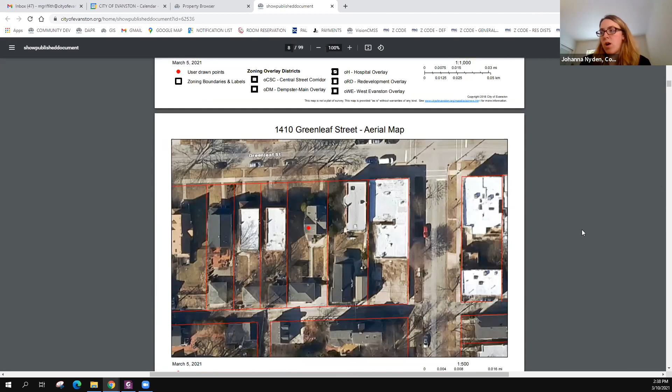Motion passes. Next up is 1410 New Business, Greenleaf Street, preliminary and final review. Laszlo Simovic, applicant, submits for a building permit to construct a new 2-story building with an office and residential live-workspace, and a second dwelling on the second floor with an attached 3-car garage in the B1 district.

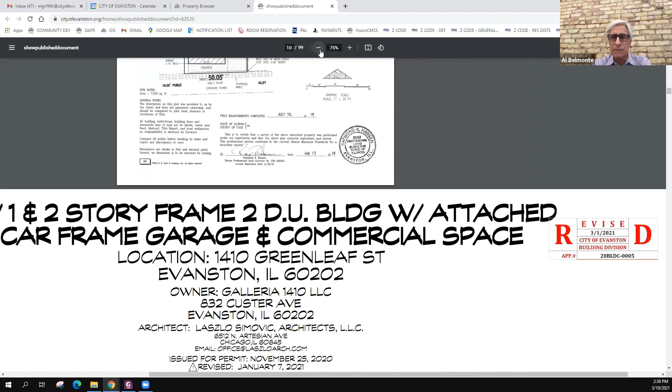Mr. Simovic, are you on the call? Actually, it's Al Belmonte, I'll be handling the presentation instead of Laszlo. All right, why don't you walk us through what the proposal here is?

The existing 2-flat on the site now was deemed too expensive to rehab, so we began to look at alternatives for redeveloping the site. The proposal we came up with maintains compliance with the B1 guidelines. The front part of the lot would be developed as a 2-story office building, connected by a 1-story connection to what we call the middle or center building, which is a combination office and residential, more live-work space.

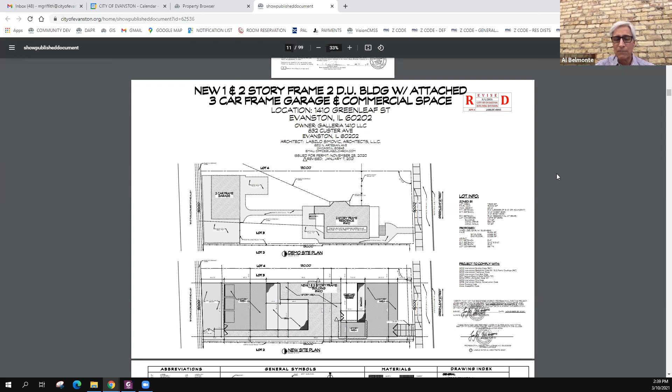I should footnote this would be my personal residence. My intention was to move there. We've lived in the neighborhood for 40 years, recently sold a house 20 feet south of this on Wesley, and our plan was to transition from that house to a new house on Greenleaf. The final component of the site was the 3-car garage with the apartment above, which again would be for personal use, not for rental or temporary B&B type occupancy. It's primarily for our family to use.

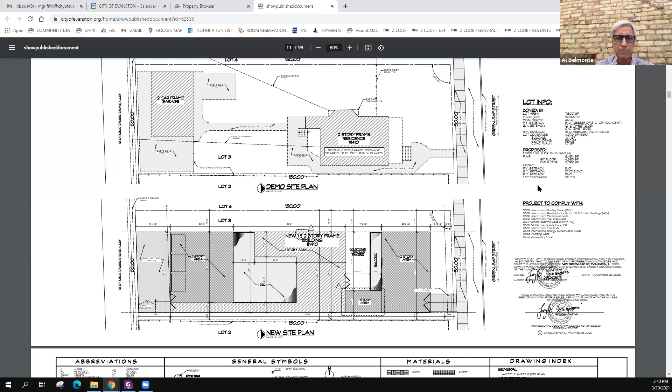Are there any questions from staff? My only comment would be, I know you're in for permit here, so a separate permit is going to be needed for the demolition of the existing 2-flat. I don't see record of that.

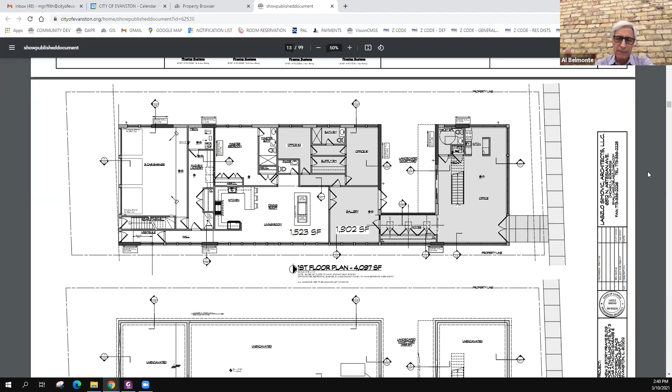Right, and I've signed a contract with Evanston Rebuilding Warehouse, and we're actually going to pull the permit. There's a lot of steps we have to do in order to pull the permit for demo, but the plan would be to retain them as the demolition company. Okay, they're very familiar with the process, so that's good. Yeah, I've met with them several times. We've scoped it out, and we intend to reuse or reclaim as much of the existing home as possible. Okay, thank you.

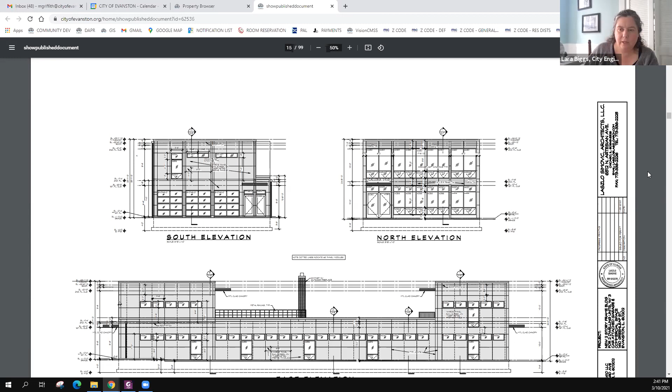Any other comments or questions? How would waste management be handled at this building? There's an area off the back near the garage which would be for our containers. Are you anticipating just the regular rolling garbage cans or an actual dumpster? No dumpster, just the standard city carts.

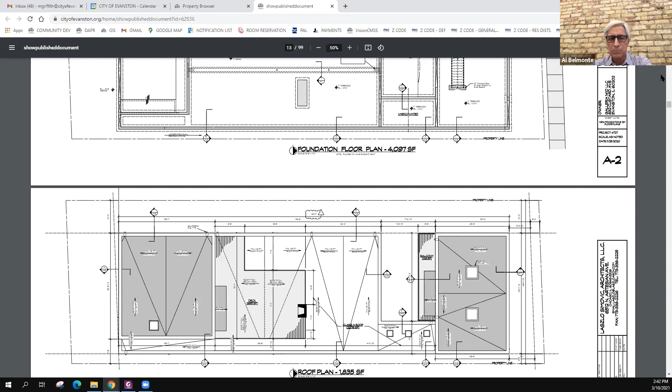We designed a 10-foot swath on the west side of the property, which would allow for storage of the containers and the carts. Lara, do you have a particular concern, or were you just getting clarification? I was just getting clarification.

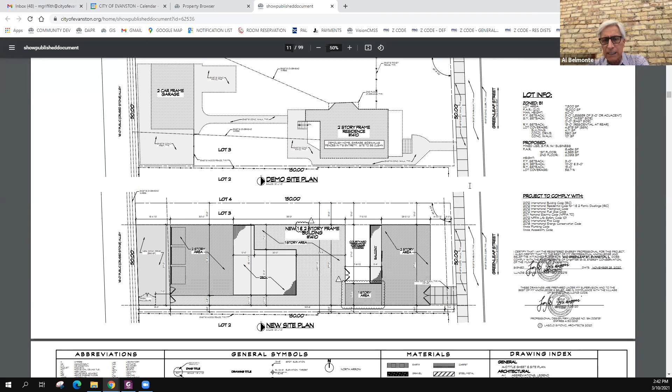I guess the concern is that when you're talking about having a commercial office space, it looks like in order for the people at the office to get rid of their waste, they have to walk through the building and to the garage. Well, there's a 10-foot, actually a little bit more, landscape path on the west side of the lot, and that'll be a landscape path all the way to the back of the property, and they'll be able to access that right off of the courtyard that opens into their space.

And again, it's intended for my personal use, so I don't anticipate any issue with me taking the garbage out, because I do it anyway.

And then because this is a partial commercial building, there is not the same requirement for impervious surface, correct? I guess that's more of a question for staff. We've prepared civil engineering drawings with the intent to comply with the impervious surface requirements, so we will make sure of that.

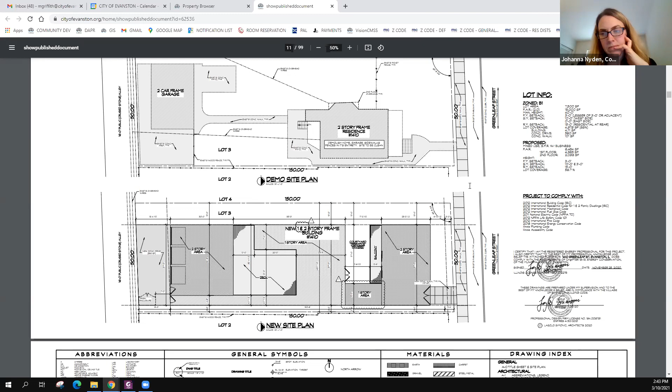All right, any other questions or comments? I have a comment. Did someone else want to speak, or should I go ahead? Go ahead, Kate.

I know you said it was compliant with the zoning code. I do have some concerns with the relationship of the scale of this building, the ratio of the building to the open space on the lot. It seems out of character for this business district, and additionally the residential district to the north. It really consumes about the entire lot, and I wondered if it could be a little bit smaller footprint. It would be more contextual.

I had similar concerns with the material selection. It's really out of context with some nice traditional masonry commercial buildings in this business district. The front-facing facade lacks a lot of relief compared to some of the existing buildings. I wondered if you could comment on that.

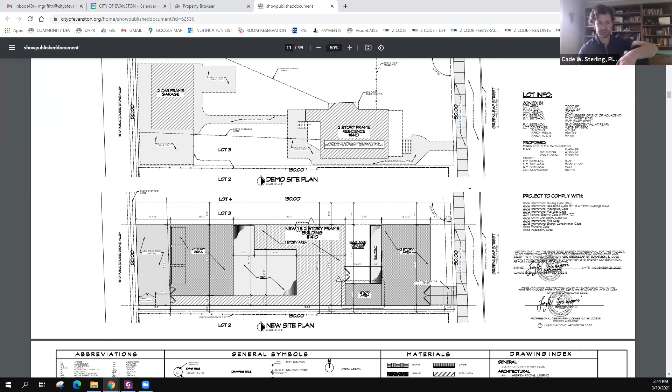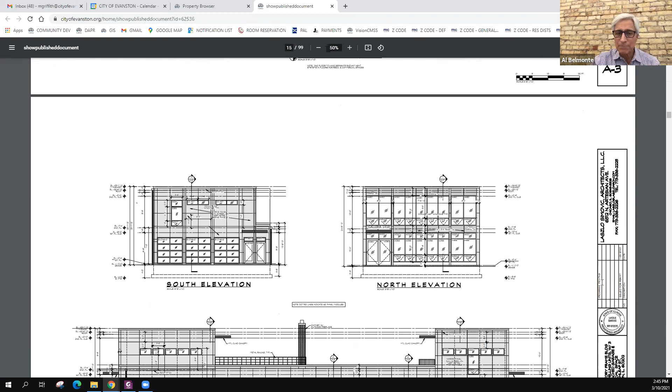Well, again, having lived in the neighborhood for 40 years, I understand what you're saying. Immediately across the street from the site, I think it's 1411 Greenleaf. It's basically 100% lot line to lot line, including the structure on the site and the paving. So in some regards, I think it is consistent with what's in the area.

My neighbor to the east, Russell, has his cello studio on the ground floor of the building. If you look at the footprint of his lot, it's not dissimilar to what I'm proposing. He has a coach house in the back, and his 2-flat extends all the way almost to the coach house. He's got a small yard in the center. Again, to some degree I agree it's not consistent style-wise or material-wise, but it is consistent with the type of use that's in that area.

The building on the corner, 1400 Greenleaf, is lot line to lot line, 1-story commercial. It looks commercial, and the materials have been on that building for not 40 years, because when we moved in there, that was a masonry 1-story storefront type building, and then they covered it with board and batten pine siding.

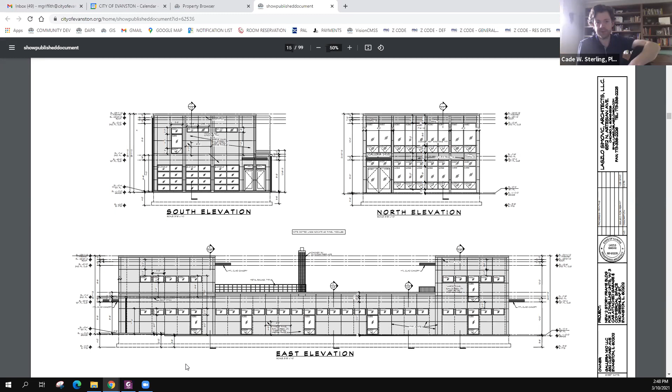And then my last point I'll make is just, after kind of business hours, if there's a way to add some kind of illumination to that storefront, whether it's interior or exterior, that just adds some life and vibrancy to the district. That's my intent. In fact, it doesn't show up very well on this drawing, but there's a metal canopy that extends above the double entry door, and we will have lighting there. I don't want it to be garish, but yeah, the intent is definitely to have lighting there.

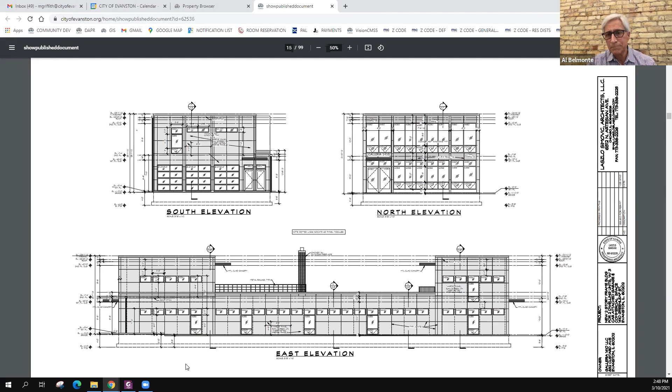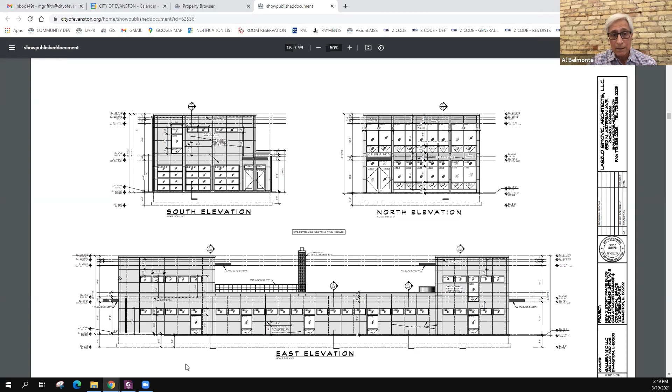Okay, thank you. I just wanted to ask, I'm not clear on whether the current property is occupied or not, because I'm trying to figure out if it's subject to the demolition tax. Yes. Okay, yep, just wanted to check. Thank you. Yep, just keep adding to the bill.

All right, other comments or questions?

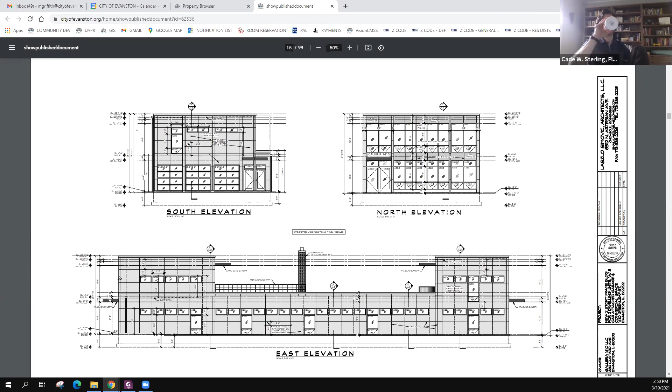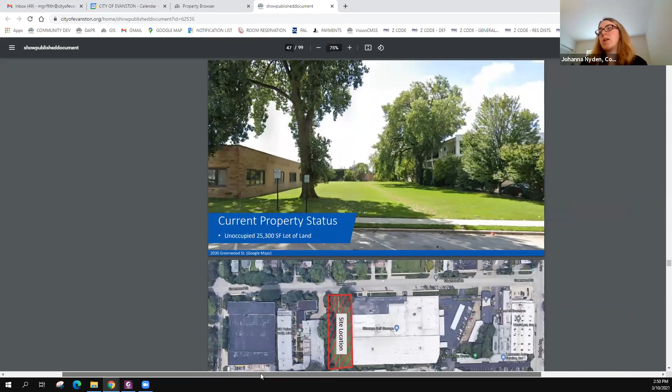Next up, 2030 Greenwood Street, recommendation of Plan Commission and ZBA. This Bohan Artunovic. Applicant submits for a map amendment to rezone property from the I-2 General Industrial District to the MXE Mixed Use Employment District, and major variations for 24 units, 20 regular units plus 4 IHO bonus units, where 22 dwelling units are permitted, and a building height of 4 stories at 38 feet, where 3 stories at 41 feet is permitted.

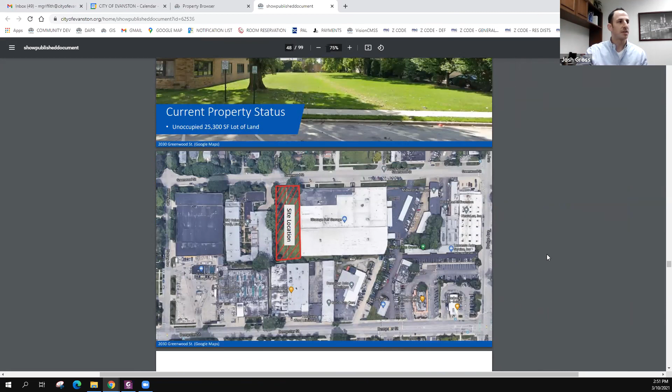Bohan, why don't you walk us through what the proposal is? Hi everyone, I'm Josh Gross. I'm actually going to be walking you through this real quick, if that's okay. Would it be possible for me to share my screen? Sure, you can share your screen. Okay perfect, I'll take you guys through this.

Okay, you guys can see this okay? Yes, we can. Perfect, perfect. So like I said, my name is Josh Gross. I've got Bohan with me as well. Bohan, you there? Yeah, he's got it, he's on mute, he's good. We're good. So just want to thank everyone for your time today, appreciate you guys letting us present.

I'll be taking you through the proposed building we're looking to develop on 2030 Greenwood Street. To get started, we'll give you an overview of what we're planning to do. The overall goal is to build a multi-story 24-unit apartment complex, made up of 3 one-bedroom units and 21 two-bedroom units. Of those 24 units, we plan to have 2 IHO affordable housing units, as well as 2 ADA accessible units.

One thing we're very proud of and want to call out is that there's a difference between adaptable and accessible. These will be accessible, grade-level, wheelchair-accessible units, which we're very excited about.

Going into the overall size of the building, we're looking to do a building that's going to be just over 9,300 square feet. The overall area, including our parking garage and building A and building B, will total just over 36,000 square feet. We're very excited about the 39 on-site, completely covered parking spots we'll be building. To give some conceptualization of the size of the apartments, we're looking at about 600 square feet a unit, ranging on the higher side to 1,250 square feet. For rent, we're looking between $2 and $2.25 per square foot.

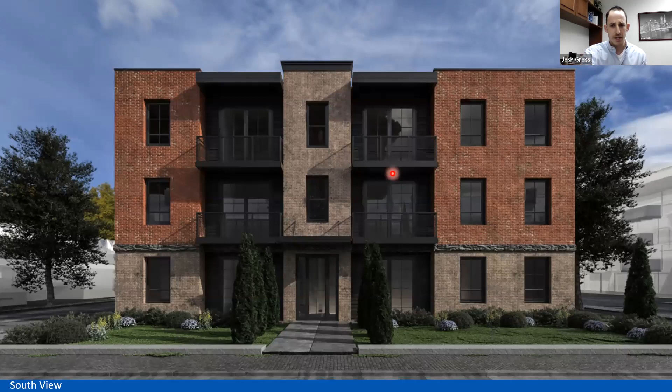Without further ado, here's our front-facing facade. This would be building A, visible from Greenwood. This would be housing our 6 units, with 3 single-bedroom units on the west side and 3 two-bedroom units on the east side. One thing that's very important for us is greenery.

I'm a green thumb myself. One thing you'll see throughout this entire presentation is our focus on greenery, trees, grass, bushes, plants, things of that nature, all to tie in with the overall decor and aesthetics of the whole property. As we move on to the additional renderings, I want to give you a quick little tour.

On the west side of the building, which you can't really see from this angle, we've got a long pathway that gets you to the back of building A and gives access to building B. On the east side is where we'll have our driveway. If we take a stroll down the driveway, here you'll see building A that we were just at, and we're driving down. This would be the entire footprint of building B, which will house 18 units, all 2-bed, 2-bath units.

The property is constructed of 3 buildings. You have these 3 vestibules right here, which will give you access to 6 units, 3 on each side. All of our parking, as mentioned, is completely covered, housed on that first floor. Then we've got our 3 additional floors on top of that, which is where all of our apartments will be.

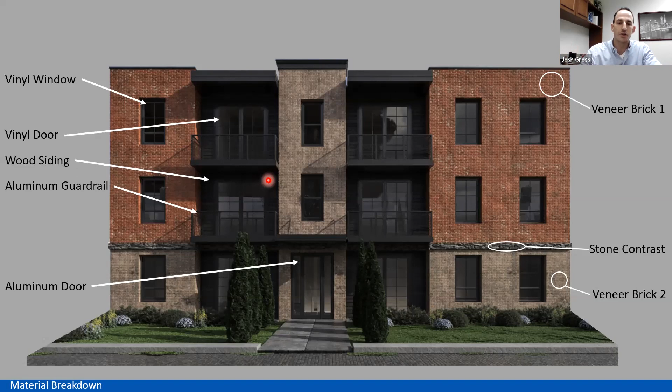We've got darker stained wood throughout the balconies. Then as we go to building B, which you can see much better, we're going to accent the building with wood paneling. You'll see that on the side of the building, as well as on each vestibule on both sides. It's a nice way of changing it up. Brick and stone can sometimes be very heavy on the eye, so this creates some contrast without adding too much weight.

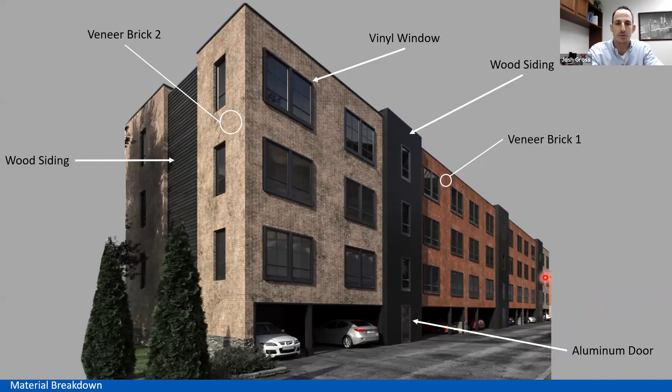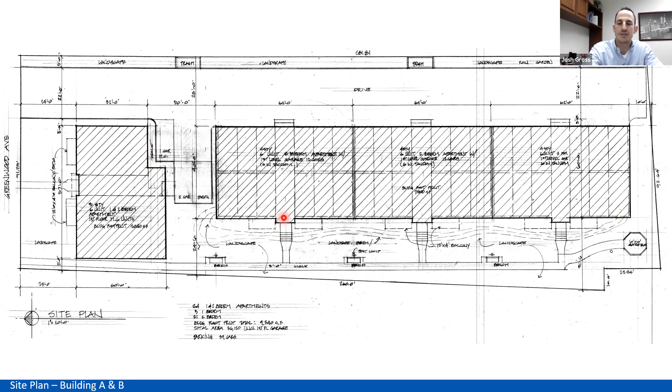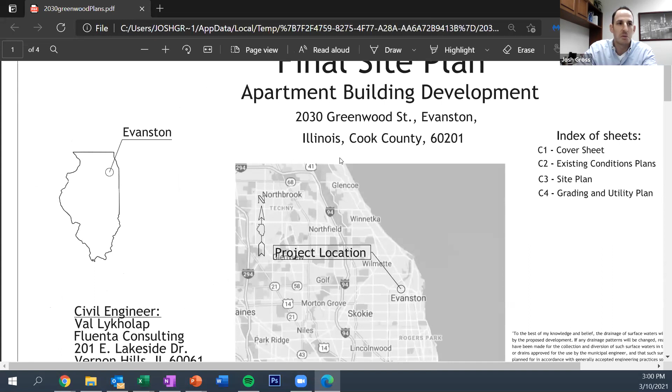Is this new rendering coming through? Yep, okay, yes, it's perfect. Yes, we can see it. Excellent. So this is from our civil engineer, just another take on the property.

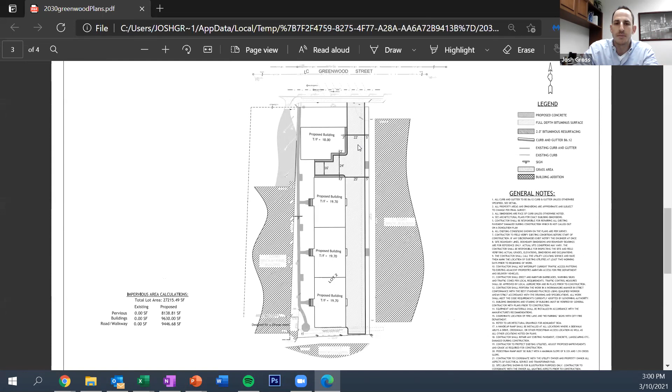So this is kind of just the property as is now, the existing condition. And here is an additional site plan showing curbs, gutters, and additional layouts. But the part I wanted to show you guys, I don't know if Melissa passes this through to everybody, but this is our grading and utility plan. We've got all of this set in place, which shows the flow of water and how everything's going to be drained, basically the overall utility and grading of the building. We can go into this in further detail if you guys need, or we can distribute this for you to review at a later date.

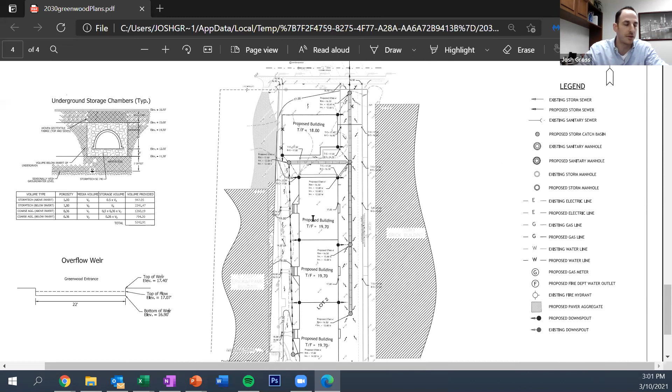If you don't have anything else to present, why don't we pause there and go back to the site plan, and we can start asking questions.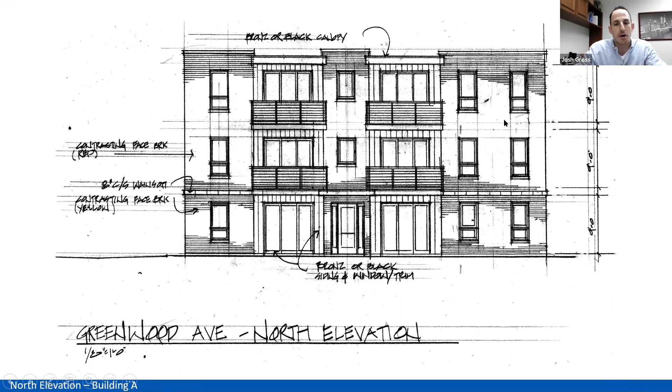Okay, there were a few things I wanted to go over on elevation, if that's okay. The next thing is the elevation, since I know this was coming up at the end. The cool thing about this is, because we have two buildings, building A is actually going to be 30 feet tall. We've got 3 stories because it does not have a parking garage underneath it, so it's on the shorter side. Looking back through to building B, which does have the garage, we're coming in under 41 feet, at 40 feet. So that's something we're very excited about, it won't be anything too overwhelming.

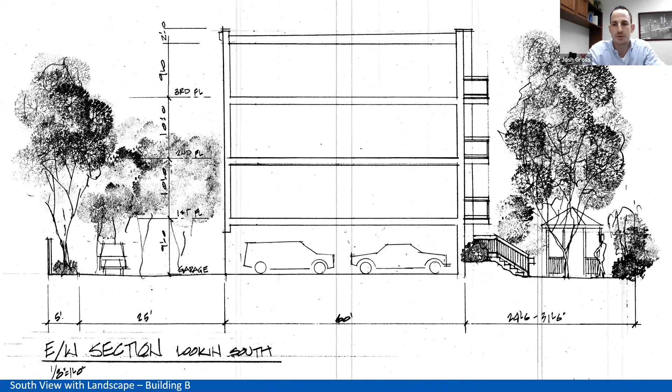Here's that same view with some trees and greenery. Here is the south elevation of building B. Again, the parking garage will come up to this line, and then we've got floor 1, floor 2, floor 3 that will be our apartment units, with some greenery as well. Here's the opposite side, so you can see where the height comes into play—again, parking garage, and then 3 floors of apartments.

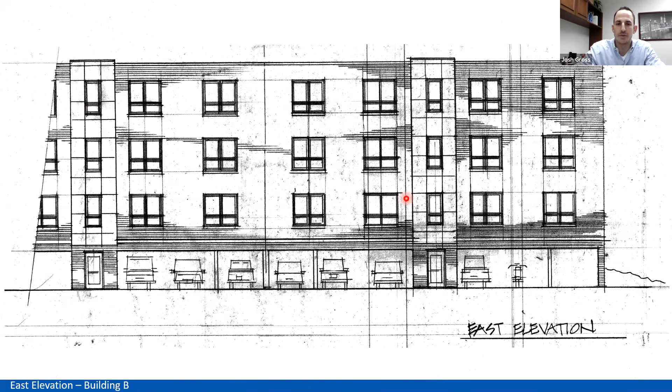Do you want to go over floor plans? I think we're okay to not go over floor plans. Okay, fine, I think this group can talk a little bit more about site issues. Okay, perfect. Then where would you like me to go?

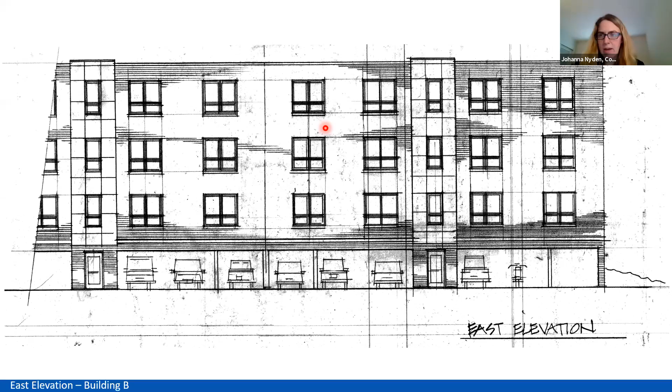Why don't you go back to the site plan, and we'll start maybe with public works, if you have any comments on this.

Comment would be, where would the refuse collection take place from? And will there be enough room for a refuse truck to turn inside, or will they have to back up on the drive? Just being mindful of cars coming out of blind parking spots like that. Yeah, so all of our trash will be located on the east side of the building. We've got a 20-foot wide drive.

Josh, I think you're breaking up a little bit. I'm breaking up, yes. Is it better now? I would suggest maybe just turning your video off, that sometimes helps with the audio. Okay, let me.

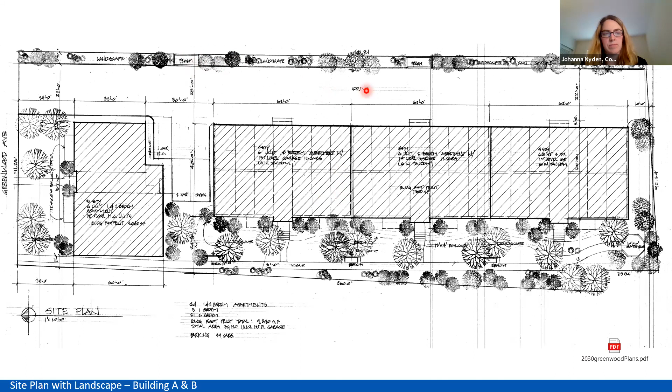So pertaining to the trash, we've got that 20-foot wide driveway, which does meet the code. Our trash will be located in 2 areas, right here and right here. Due to the amount of tenants we're having, we're not looking for a massive dumpster. We don't think we're going to be going through that much trash. So we should be able to fit pretty considerable size dumpsters in these 2 spots and be able to get that picked up and removed without any issues.

Okay, thank you. You're welcome.

Another concern here would just be for snow removal. Private entities aren't able to push any snow from private property onto the city right-of-way or city property. So do you have a plan of what you would do with the snow from within your drive and property?

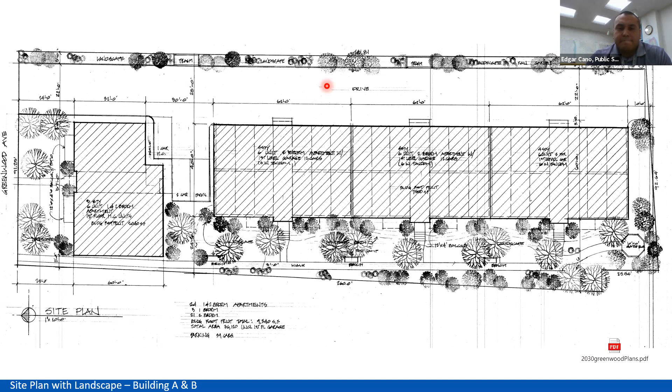You broke up slightly. I think the question was snow removal, correct? Correct, snow removal. Do you have a place that you would be storing it, or will you be hauling it out?

The idea is, obviously these last couple of weeks we had more snow than anyone knew what to do with. In typical fashion, the idea would be to push, if we have an inch or two of snow, along this eastern side and then store the balance in the back. If it did get to a point where it was overwhelming and too much for us to hold and allow our residents to enter and exit their parking garages, especially on the south end right here.

Part of our business is actually a loading and hauling company. So if it got to a point where we couldn't do anything, we would send a truck, load it up and haul the snow away at our own expense to bring it to a facility where it can be stored indoors, melted. And then if we needed to go back the next day or remaining, we can take care of all that. Sounds good.

Thank you. You're welcome. Thank you. Josh, just be aware that's going to be reflected in the minutes. So we will hold you to that when we have another big snowfall someday. Wouldn't say it if it wasn't true. Don't worry.

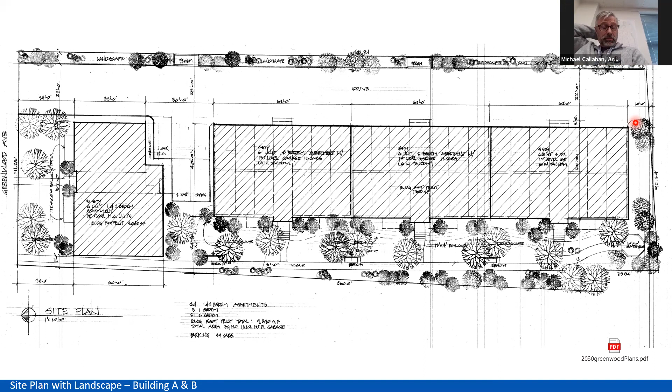Other questions, Public Works staff? I have a question, actually a couple. So that landscaping on the east side, that's going to be right up against the property line and right up against the building to the east side. How's that going to be impacting their structure, and how are they going to maintain that? So the goal is obviously to go right up to our property line.

The types of trees and plants that we're going to be putting in there are going to be put in with the goal of not obstructing access to their building. I know they need access—it's a masonry building, so if they need to do tuck pointing at any point, we have to give them a certain allowance to access their building, just as we would want if it was the other way around. The idea is not to create anything too overwhelming where they would not be able to have that access, whether it's creating a drop or having to put ladders up. So we'll be working with a landscape architect to make sure we're putting stuff that is conducive for the area and allows us to work freely, as well as our neighbors to the east.

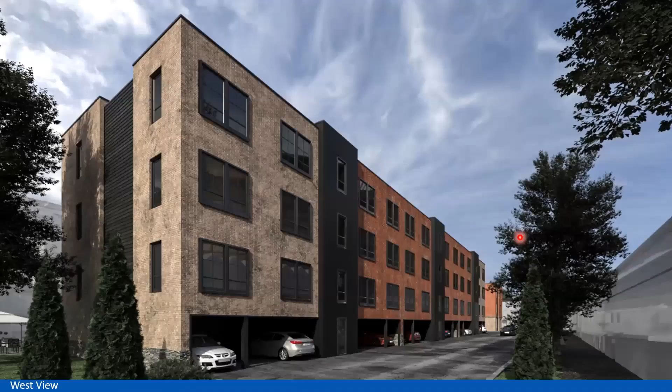And with that said, to the west—on where the driveway is at up on Greenwood and also on the west property line, there's two large cottonwood trees. Looking at this, it looks like both of those trees are going to be coming out. Let me just make sure. So, sorry—as of right now, the plan is this tree will most likely need to come down to make room for our driveway.

But other than that, we have no plan to tear down any other trees. We want to keep them. This tree in the back will most likely need to be trimmed, but the goal as of right now is that it does not affect our building plans in any way and does not need to be removed. So you're keeping the landscaping what's currently there on the west side then? That is the goal, yes sir.

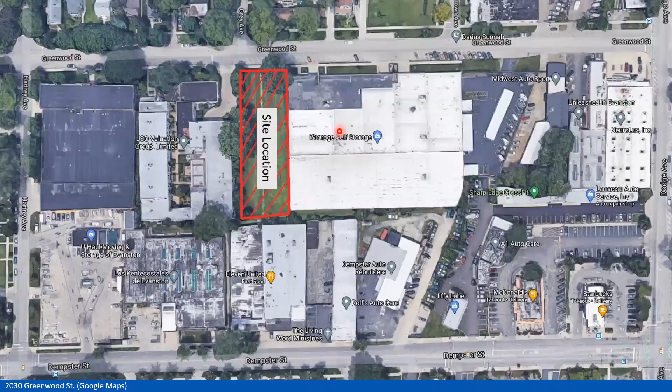Any other questions we can answer?

I have a couple of questions with regards to the parking. Are the spaces going to be inclusive, offered with each rental unit, or is there going to be a separate fee charged for parking spaces?

It's a great question. We actually just spoke about that yesterday. Right now, the plan is to have a very minimal fee for parking to almost incentivize people not to park.

Because we do know, based on past meetings we've had in the ward back in February, parking is an issue in this area. And with the way things are going right now, people are working from home, working remotely.

Obviously a lot of companies are imposing 3-day work weeks, or people don't even come to the office anymore. So if we can incentivize people to not have cars and utilize public transportation, bikes, or whatever the case may be, we're hoping that small fee will come into play.

So that way we can have as little parking as possible. We'd rather have too much parking available than not enough, but that's something we literally just talked about a couple of days ago.

I'm just worried that if the fee is too high, people will still retain vehicles. They just won't opt to lease the space from you, and they'll be looking for spaces on the arterial streets in the neighborhood.

No, if there is a fee, it will be very, very minimal. We didn't come up with an exact dollar amount, but it won't be anything astronomical. Just for comparison, I know city parking could be like $200, $250 a month. This will be nowhere near that.

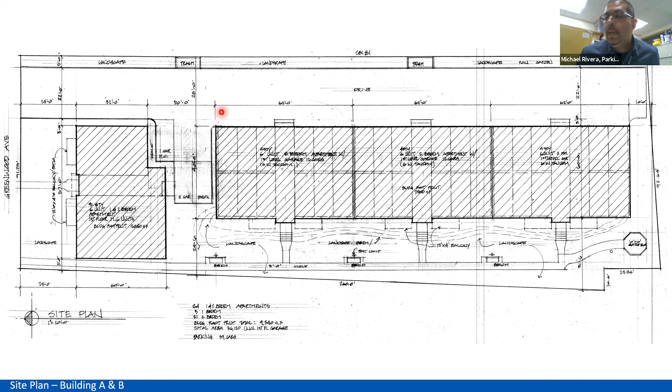So are you concerned about the height or more width? Both. Okay, so one thing about the height, we did talk with our architect.

If it did come into it and we needed to adjust the height of the garage, we could do that and take some off, because basically, if you look at our elevation, we're planning on 10-foot ceilings for floor 1 and floor 2.

So if we did need to add some more space for that first floor, that's definitely something we have some wiggle room on. As far as width goes, everything we have right now seems to be working.

We've used these spaces with other properties that we've had the same size, and we haven't had any issues, but it's definitely something we can look into, should it be a continued concern.

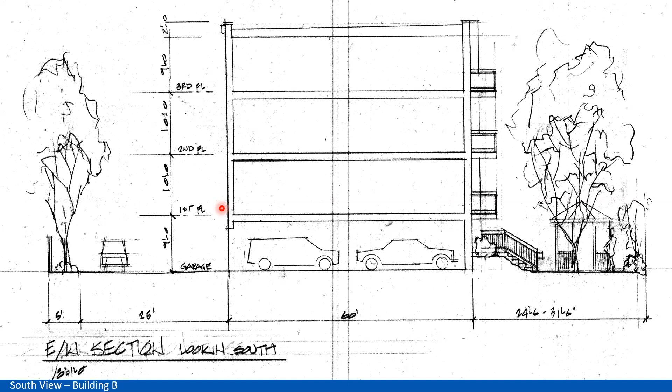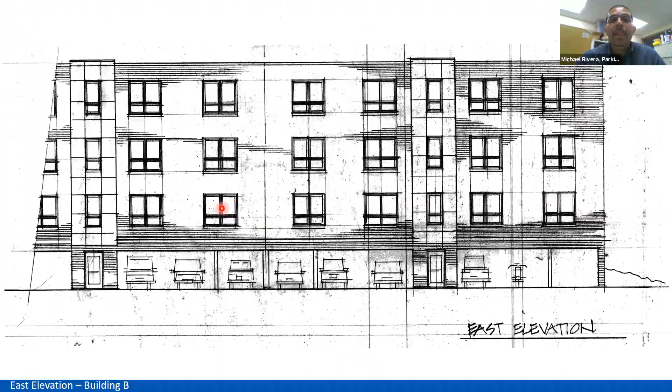Okay, so the width, what is the width exactly for the record, for the spaces? Is that like 7 by 17? Let me pull that up real quick. It looks like the width is going to be 8 feet 7 inches.

And the length? The length is going to be 19.6. Okay, great. All right, thank you. That's all I have. Thank you. You're very welcome. Thank you.

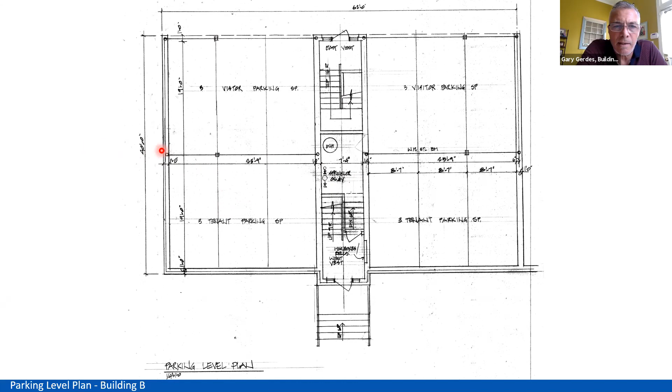Just to follow up on that, I'm not seeing accessible spaces here. You're providing accessible units, but I'm not seeing accessible parking. Yes, sir. Those are actually going to be located right here behind building A.

We're going to be having our accessible units in building A on the first floor, so they will have their parking spots right behind the building, with access right by this vestibule here.

Another question here. Your brick, is that going to be a modular brick, or are you going to be using more of a brick precast panel? Bojan, you want to step in on the material?

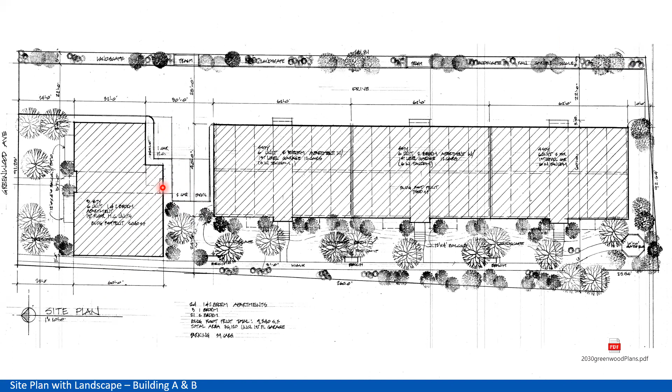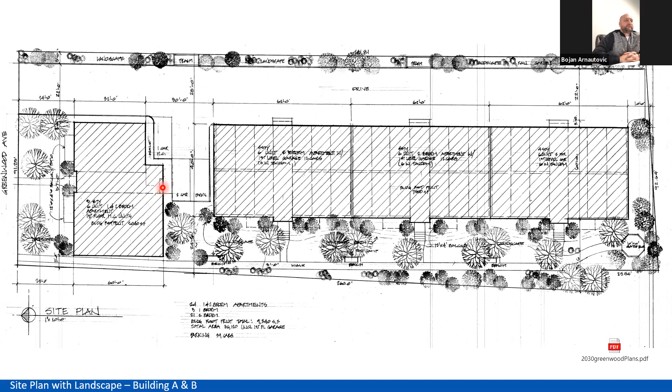Yeah, so we are planning on doing veneer brick, right? Josh, if you want to scroll to the page, the plan is to... do you hear me? Yes, the plan is to use a veneer brick with accents of the wooden panels. Okay, but I guess my question is: is it going to be a typical brick, or is it going to be a panel that is applied? It will be a typical brick panel, correct? So they'll come in pieces.

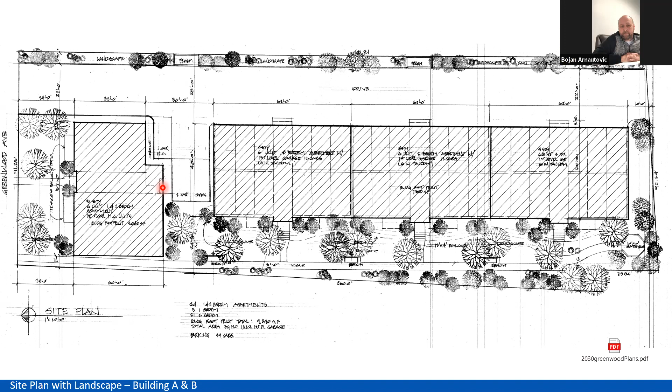Okay, all right. Yep, and then final is just a comment. So on this project, we would require a construction management plan that covers the management and logistics of the project, which would have to be in place prior to any construction activity. Of course, we can provide you with a total plan with everything - how we're going to start from the beginning, with all the contractor parking, construction site fencing, signage. Safety is always the first priority before we start anything else. I can provide you some recent ones that have been used. Of course, we would love to do that. Yep, definitely.

Could you address the water service to the complex here? Are you going to have a mechanical room in one building, or what are your intentions for the water service? So David, each building is designed - each condo, each apartment is individually designed. So each unit will have its own water heater, but most likely, I believe in building A there's a mechanical room, and then you're going to have one in building B. But we have to work on that yet with the architect, the engineer, and everybody else.

Okay, we'll have to check with the water department on how many meters will be allowed here - if it's just one or two, we'll have to check on that. I believe, if I'm correct, there will be two - one for building A and one for building B. Thank you. Of course, thank you.

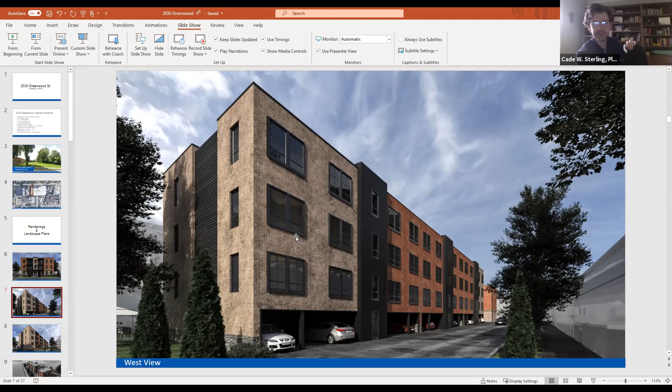Well, as you work further through that, let's continue to have conversations about it. Of course. On architectural drawings, we will have all these details planned out. I just have not gone that far yet. I wanted to go through the meetings first.

I did hire an engineer to talk a little about water management, because that's the one I really wanted to understand, how that's going to be flowing. But for the windows, everything is going to be inset. Vinyl works the best from what I've seen so far, because of the longevity, the care of them, the maintenance, and obviously the efficiency.

Did you consider a fiberglass window, like a Fibrex product? I could definitely take a look at it. Okay, thank you. Yeah, of course.

So I would recommend that our approval is contingent on further material study, because I think it looks nice, but I don't know what this 1x1 square of veneer looks like. If we were in person, like I've said at a lot of meetings lately, we would be able to see the material, look at it, and understand how it would look and feel like a brick, or if it didn't. So I think we need to make arrangements to see the material, because this is a pretty large project, and would want any motion to move forward to be conditioned on the materials not yet being approved, and that we would want to see more detail.

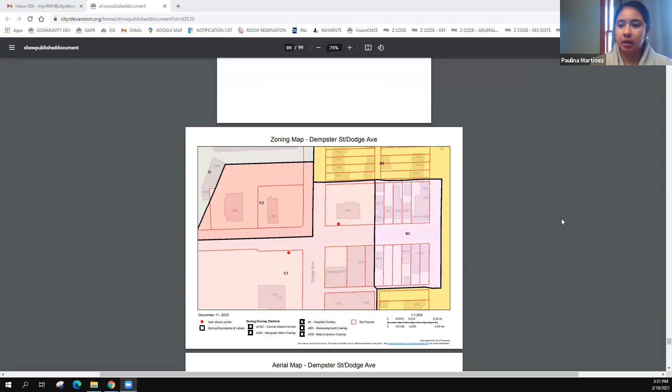Hello, Paulina. Hello, Stephen. Who is going to talk about this? I will let Jessica lead the way, and then if there are any questions regarding the specific comments that the Arts Council made, I'd be happy to talk about them.

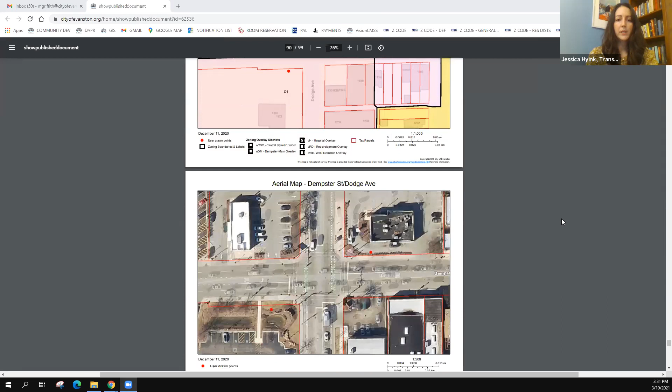As part of the Dempster Dodge bus shelter program that Pace is doing as part of the Pace Pulse Dempster line, they offer communities a community expression. The city contracted with Ben Blount to do the artwork for the bus shelters. Unfortunately, Ben could not be in attendance today. You'll see the work that he presented to the Arts Council, which received positive feedback.

Some items that the Arts Council brought up that were clarified later were whether a bench would interfere with the artwork, and a bench will not interfere with the artwork. Everything will be fully visible, and the bench starts below the artwork. Pace limited the colors that could be used to white, as it is applied to a film placed on the panels, and Steve and Andrew from Pace can speak more to that. The background will be transparent.